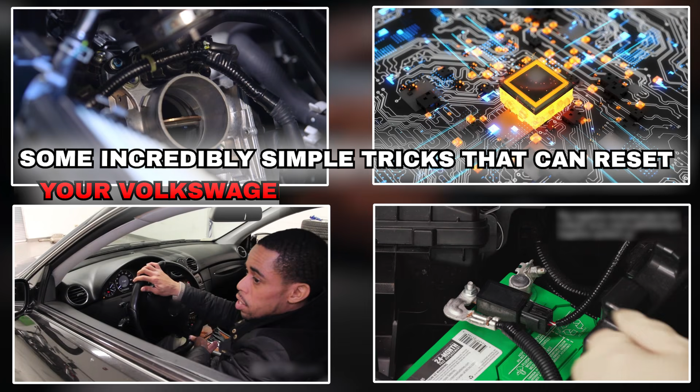If you own a Volkswagen, you've probably experienced that sinking feeling when a warning light suddenly appears on your dashboard. Maybe it's the check engine light, or perhaps the ESP warning, or even multiple lights illuminating at once like a Christmas tree. Before you panic and drive straight to the dealership, where they'll charge you hundreds just to plug in a diagnostic scanner, I'm going to share some incredibly simple tricks that can reset your Volkswagen and eliminate electronic faults without spending a single dollar.

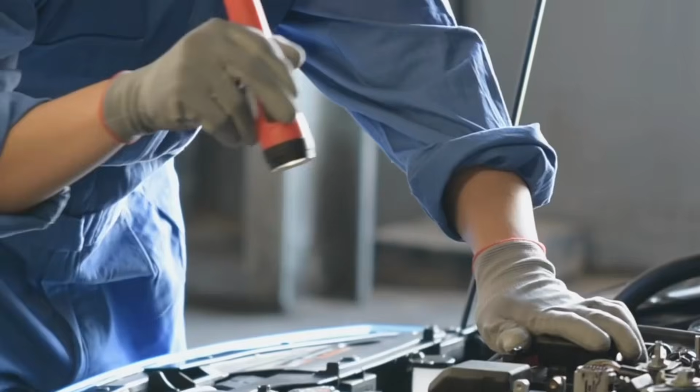These are the tricks that VW technicians know but rarely share, the same methods that dealerships use before they even start diagnosing real problems. Today, you're going to learn exactly how to do this yourself, and you'll be amazed at how many issues simply disappear with these reset procedures.

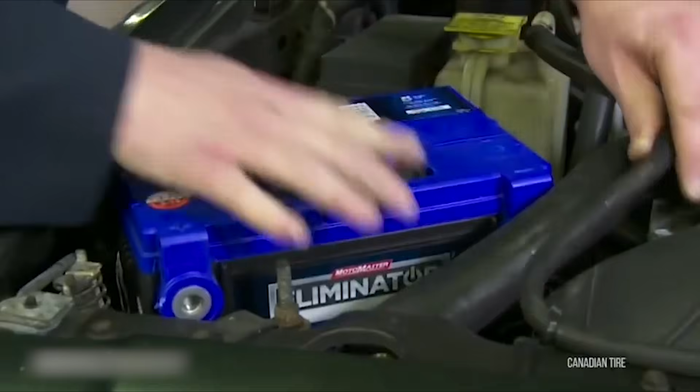Trick number 1. The battery disconnect reset. The first and most powerful trick is the battery disconnect reset, and it's so simple that you'll wonder why nobody told you about this before. This method works on virtually every Volkswagen ever made, from classic air-cooled Beetles to the latest electric ID models.

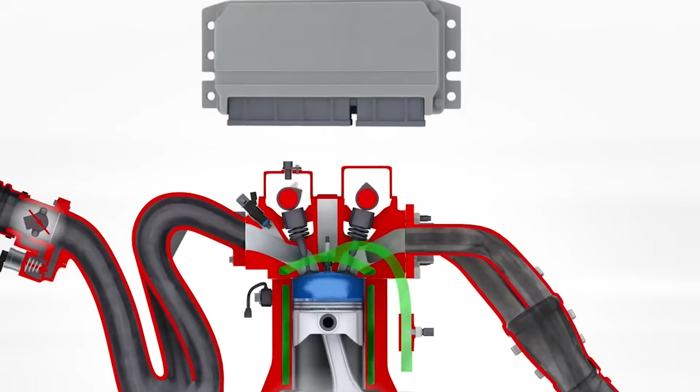Here's what happens inside your VW's computer systems. Over time, the various control modules store fault codes and adaptation values that can become corrupted or outdated. Sometimes a glitch occurs, a sensor sends a bad reading, or the computer simply gets confused by conflicting information. The battery disconnect reset clears all of this out and forces the system to start fresh.

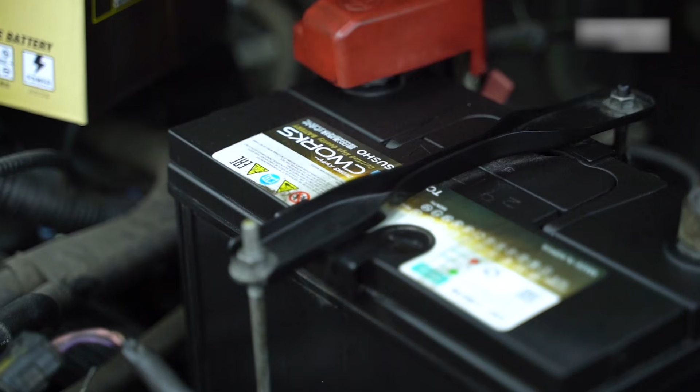To perform this reset, you'll need to locate your battery, which in most VWs is either under the hood or in the trunk. Once you've found it, you're going to disconnect the negative terminal first, which is the black cable. Use a wrench to loosen the bolt, slide the cable off, and make sure it doesn't touch the battery post.

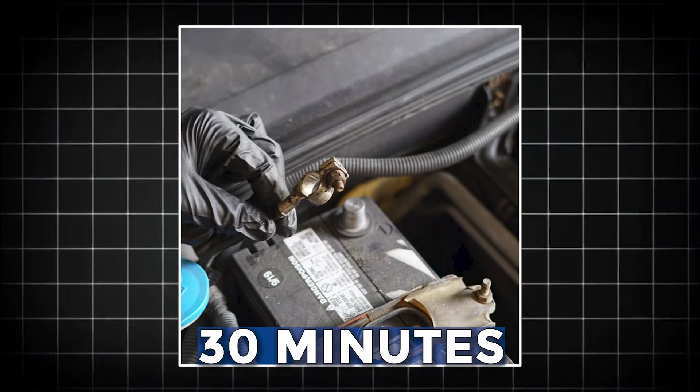Now here's the critical part that most people get wrong. You need to wait at least 15 minutes, but ideally 30 minutes or even longer. During this time, the capacitors in the various control modules fully discharge and all the stored electrical energy dissipates. Some people make the mistake of reconnecting after just a minute or two, and this doesn't fully reset the system.

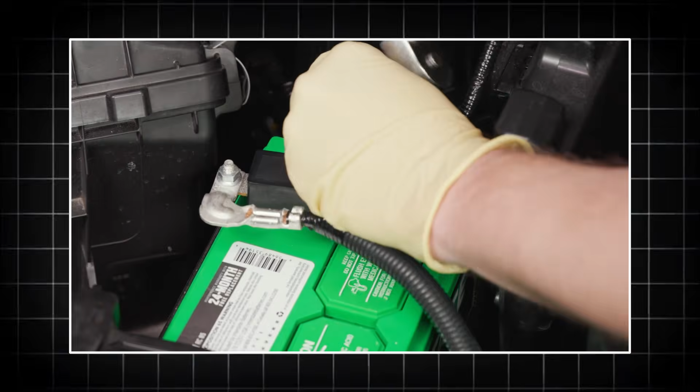After waiting the full duration, reconnect the negative terminal, tighten it securely, and start your car. You'll notice that the radio presets are gone, and the clock needs resetting, which is actually a good sign that the reset worked. Drive the car for about 20 to 30 miles, going through various conditions like highway cruising, city

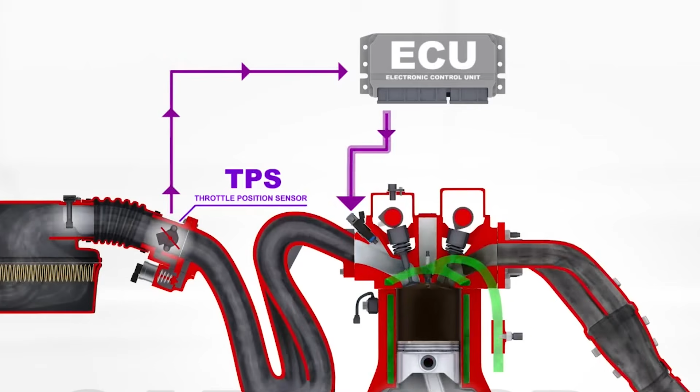driving, and some acceleration. This allows the computer to relearn all the sensors and adaptation values. In many cases, warning lights that were previously illuminated will simply stay off because the fault was just a glitch in the system.

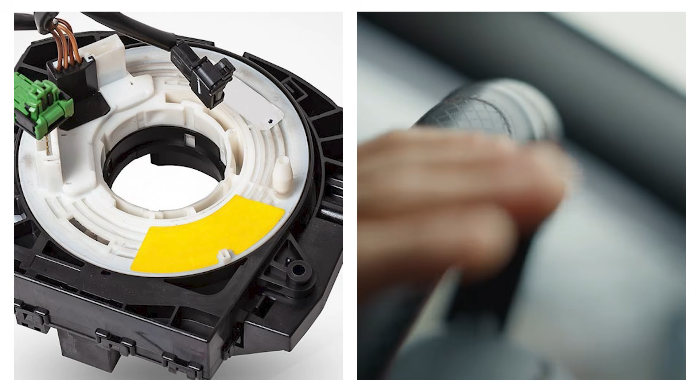Trick number 2. The steering angle sensor reset. The second trick is the steering angle sensor reset, which is incredibly important because this sensor affects multiple systems in your Volkswagen. The steering angle sensor tells the car exactly where your steering wheel is pointed, and this information is used by the ESP system, the stability control, the adaptive headlights, and even the cruise control.

When this sensor gets out of calibration, you might see ESP warnings, traction control lights, or even steering wheel position warnings. The beautiful thing is that you can often recalibrate this sensor yourself without any special tools. Start by making sure your car is on level ground and the steering wheel is perfectly centered. Turn the ignition on, but don't start the engine yet.

Now turn the steering wheel all the way to the left until it stops. Hold it there for 2 seconds, then turn it all the way to the right until it stops, and hold it there for 2 seconds. Finally, return the steering wheel to the center position. Turn off the ignition. Wait 10 seconds, then start the car. The steering angle sensor has now recalibrated itself in many VW models.

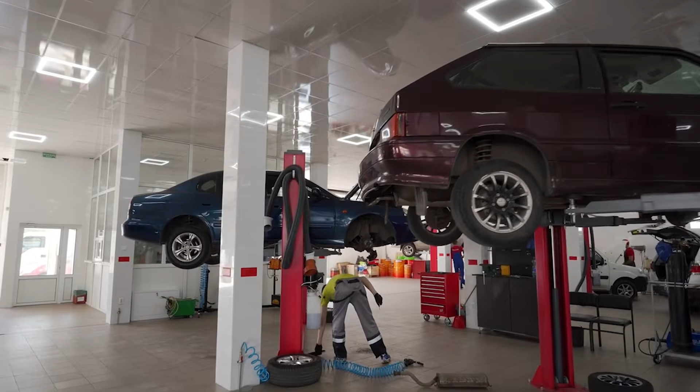If you have VCDS or OBDeleven, you can verify the calibration by checking the steering angle value, which should read very close to 0 when the wheel is centered. This simple procedure has saved countless VW owners from expensive dealership visits for something that takes less than a minute to fix.

Trick number 3. The throttle body adaptation reset.

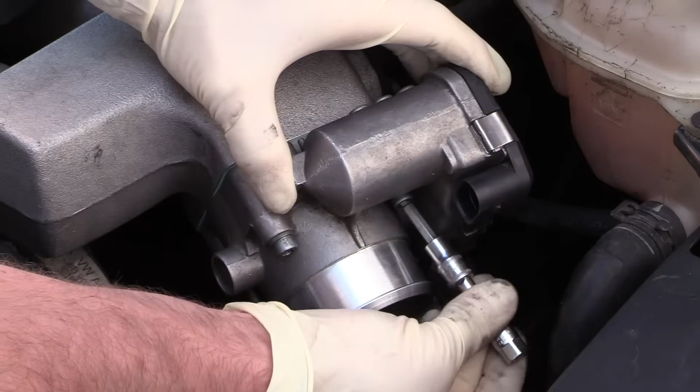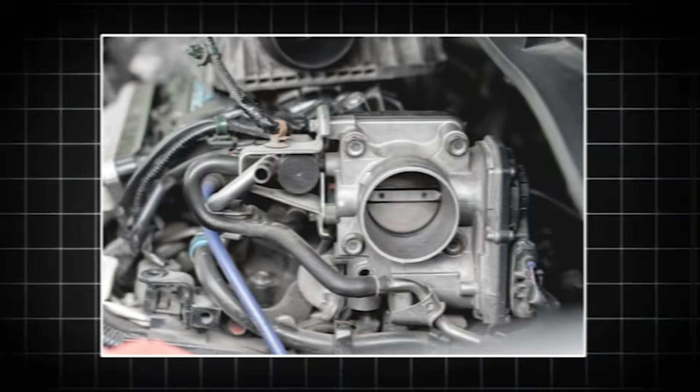The third trick involves resetting the throttle body adaptation, and this is particularly useful if you're experiencing rough idle, hesitation, or poor throttle response. Modern Volkswagens use electronic throttle control, which means there's no physical cable connecting your gas pedal to the throttle body. Instead, sensors tell the computer how far you've pressed the pedal, and the computer decides how much to open the throttle.

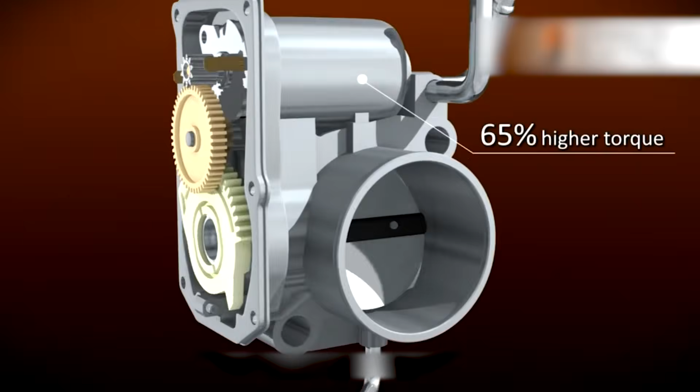Over time, carbon builds up in the throttle body, and the computer adapts to this buildup by changing how it controls the throttle position. If you clean your throttle body or if the adaptation values become corrupted, you need to reset these values so the computer can relearn the proper throttle control. The procedure is straightforward, but must be followed precisely.

Turn the ignition on without starting the engine and wait exactly 2 seconds. Now press the accelerator pedal all the way to the floor and hold it there. Keep holding it down while you turn the ignition off and continue holding for another 10 seconds. Release the pedal completely, wait another 10 seconds, then start the engine without touching the accelerator.

Let the car idle for at least 3 minutes without touching any pedals or controls. During this time, the engine might hunt a bit or idle roughly, which is completely normal. After the 3 minutes, turn off the engine, wait 10 seconds, then restart it.

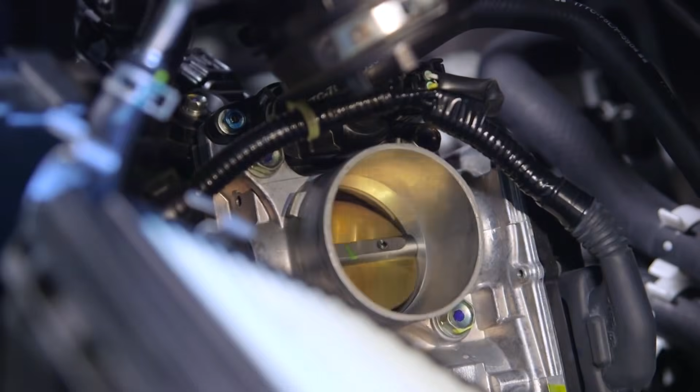The throttle body adaptation is now reset, and the computer will relearn the proper values as you drive. You should notice smoother throttle response and better idle quality immediately, and it will continue to improve over the next few drive cycles.

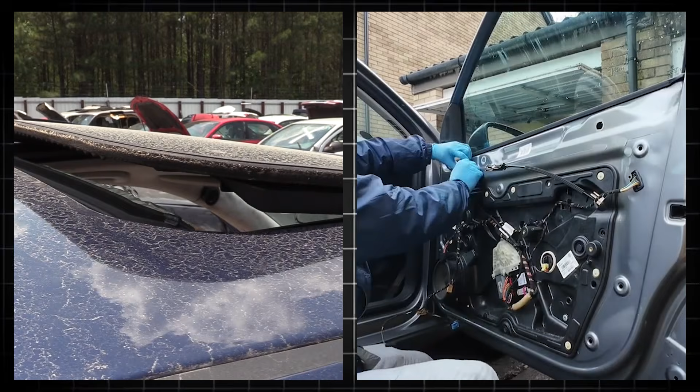Trick number 4: the window and sunroof reset. The fourth trick is the window and sunroof reset procedure. And while this might not seem like a major electronic fault, window and sunroof malfunctions can be incredibly frustrating. Volkswagen windows and sunroofs have anti-pinch sensors and auto up and down features that require the control module to know exactly where the window or sunroof is positioned at all times.

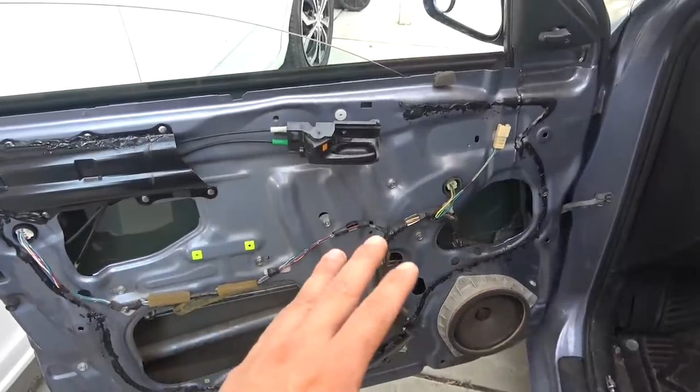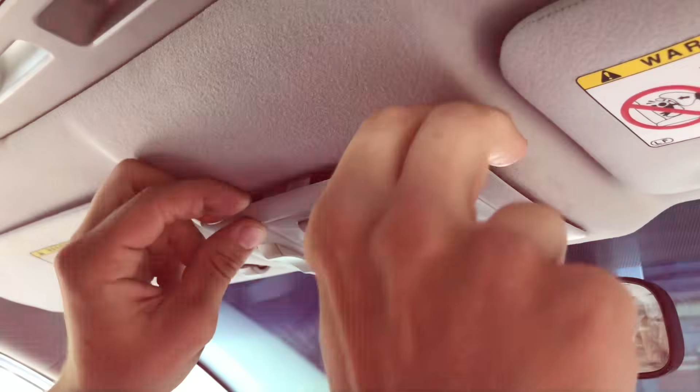If the battery has been disconnected, if the window has been forced, or if there's been any electrical glitch, these positions can become lost. When this happens, your windows might not go up or down properly, the auto function might stop working, or the sunroof might refuse to operate at all. Resetting these systems is simple, but requires patience.

For the windows, start with the driver's window. Pull the window switch up and hold it until the window is completely closed. Then continue holding the switch for an additional 5 seconds. Release the switch, wait 2 seconds, then pull it up again and hold for another 2 seconds.

Now push the switch down to open the window completely. Hold it for 5 seconds after it's fully open. Then continue holding for another 2 seconds. The window control module has now relearned the full travel range. Repeat this exact procedure for each window in the car.

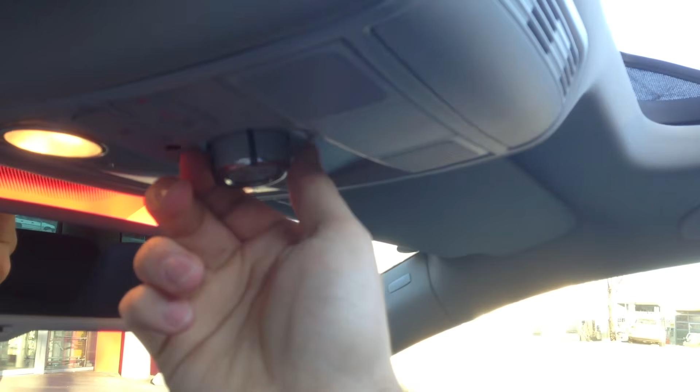For the sunroof, the process is similar but slightly different. Close the sunroof completely using the close button, then once it's closed, continue holding the button for 10 seconds. You might hear some clicking or slight movement, which is the system calibrating its endpoints.

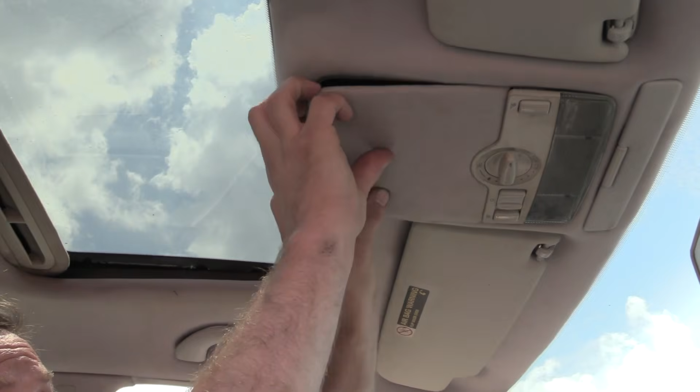Open the sunroof completely, hold the button for 10 seconds, then tilt it up fully and hold for 10 seconds. The sunroof control module now knows its full range of motion again. These resets eliminate the vast majority of window and sunroof electrical complaints that would otherwise require dealership intervention.

Trick number 5: the electronic parking brake reset. The fifth trick addresses one of the most common VW problems, the electronic parking brake fault. Many modern Volkswagens have electronic parking brakes instead of the traditional handbrake lever, and while these systems are generally reliable, they can throw errors and refuse to operate. Sometimes you'll see a warning light, sometimes the brake won't release, and sometimes it won't engage at all.

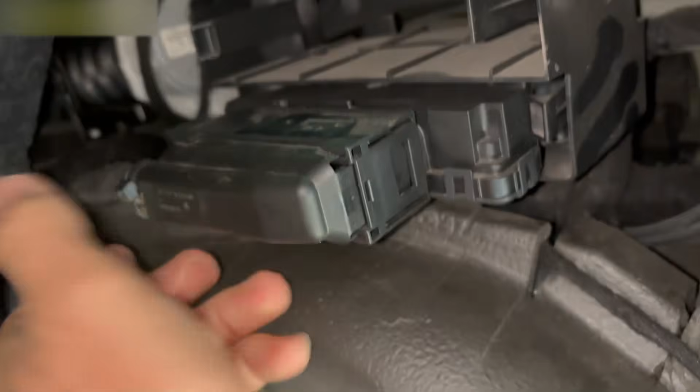Before you assume you need a new parking brake module or expensive repairs, try this reset procedure. Make sure the car is in park or neutral with the engine running. Pull and hold the parking brake switch up for about 2 seconds, then release it. Immediately push the switch down and hold it for about 2 seconds. You should hear the parking brake motor cycling, which sounds like a mechanical whirring noise. Repeat this cycle 3 or 4 times, pulling up and holding, then pushing down and holding.

What you're doing is exercising the parking brake mechanism and allowing the control module to relearn the positions. After doing this several times, turn off the engine, exit the vehicle, lock it, and let it sit for about 5 minutes. When you return and start the car, the parking brake system will have completed its calibration cycle.

This procedure often clears parking brake faults that seem serious but are actually just calibration issues. The system needs to know exactly how many steps the motor takes to fully engage and release the brake, and this exercise helps it relearn those values.

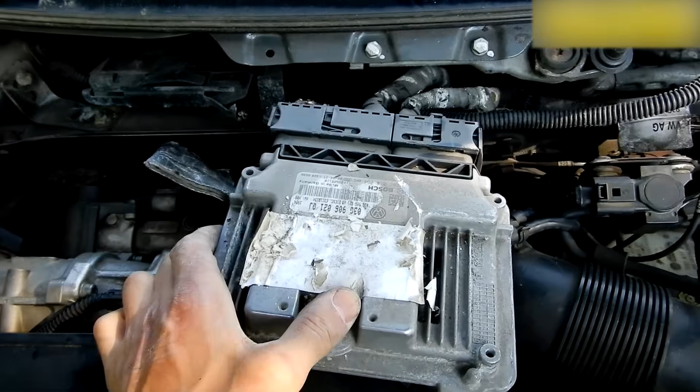Trick number 6. The ECU soft reset. The sixth trick is the ECU soft reset, which is different from the battery disconnect because it can be done without tools and without affecting your radio settings.

This reset is particularly useful when you're experiencing drivability issues, strange shifting behavior, or minor check engine lights that seem intermittent. The process takes advantage of a feature built into most VW ECUs that allows them to dump certain temporary fault codes and relearn fuel trims. Here's how to do it.

Turn your ignition to the on position without starting the car, then turn it back off. Wait 3 seconds, then turn it to on again without starting. Repeat this on-off cycle 5 times, ending with the ignition in the off position. Now turn the key to on and immediately press the accelerator pedal to the floor and release it 5 times in quick succession. After the 5th press, turn the ignition off, wait 10 seconds, then start the car normally.

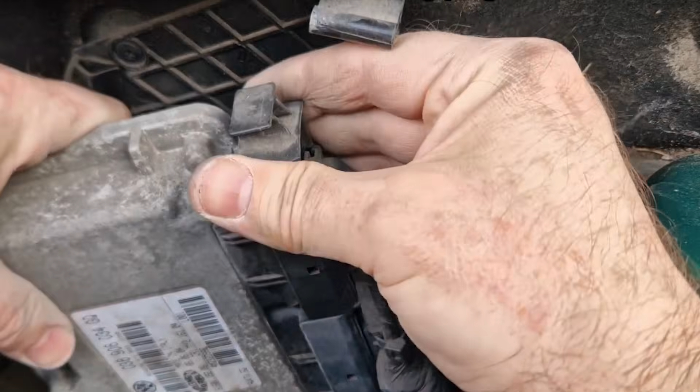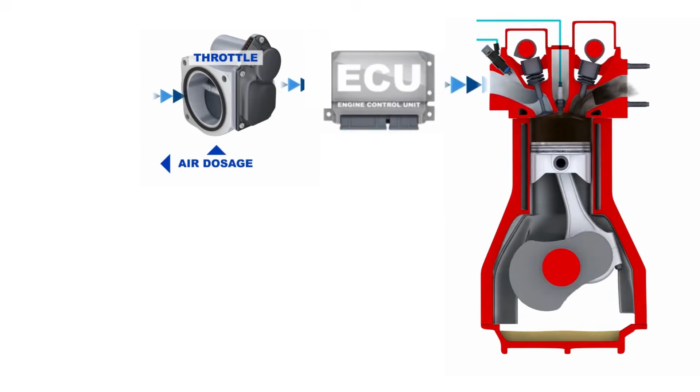What you've just done is initiated a reset sequence that many VW ECUs recognize. The computer will clear certain adaptation values and prepare to relearn fuel delivery, ignition timing, and other parameters. This doesn't clear major fault codes like a full scan tool reset would, but it does eliminate many of the minor glitches and learned behaviors that can cause drivability problems. Drive the car through several heat cycles and various conditions to allow the computer to fully relearn its optimal settings.

Trick number 7. The TPMS reset. The 7th trick involves resetting the Tire Pressure Monitoring System, or TPMS, which is required by law on all newer vehicles but can be a source of constant frustration. The TPMS warning light can illuminate for many reasons. You've rotated your tires, changed a tire, the batteries in the sensors are weak, or the system simply lost calibration.

Many VW owners don't realize that the TPMS system in their car can be reset through the infotainment system or with a specific button sequence. The exact procedure varies by model year and generation, but the most common method works like this. Make sure all 4 tires are inflated to the correct pressure as specified on your door jamb sticker.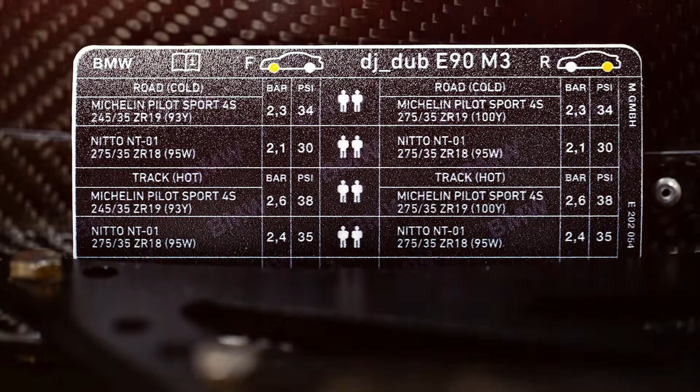Start the car and locate the car settings menu in your infotainment system. Navigate to the tire pressure section, and you should see an option that says something like Store Tire Pressures or Set Tire Pressures. Select this option and confirm. The system will now store the current pressure of all 4 tires as the new baseline.

Some older VWs don't have this menu option, and instead, you need to turn the ignition on without starting the engine, then press and hold the TPMS reset button, which is usually located below the steering column or in the glove box. Hold this button until you see the TPMS light blink 3 times, then release it. Start the car and drive for about 10 minutes at speeds above 15 miles per hour. The TPMS system will recalibrate itself, and the warning light should go out.

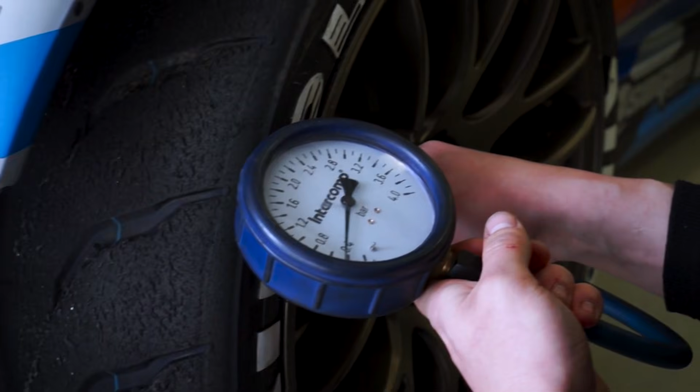If you have indirect TPMS, which is common on many VW models, the system doesn't actually measure tire pressure, but instead uses the ABS wheel speed sensors to detect differences in tire rotation. These systems need to be reset whenever you adjust tire pressures or rotate tires, and the reset procedure tells the computer what the normal rotation speed should be for each wheel.

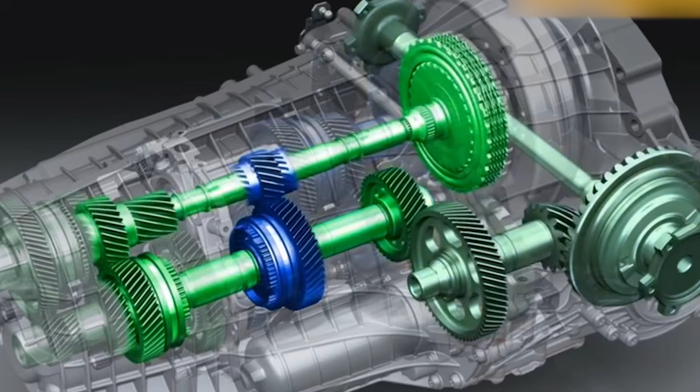Trick number 8. The transmission adaptation reset. The 8th trick is the transmission adaptation reset, and this is absolutely crucial if you're experiencing harsh shifting, delayed engagement, or erratic transmission behavior. VW automatic transmissions, particularly the DSG dual-clutch gearboxes, learn how you drive and adapt their shift patterns accordingly.

They also store values related to clutch wear, shift timing, and hydraulic pressures. Sometimes these adaptation values become corrupted or outdated, especially after battery disconnects, software updates, or unusual driving conditions. You can force the transmission to relearn these values with a simple procedure.

Start with the engine fully warmed up to operating temperature. Put the transmission in drive and come to a complete stop with your foot on the brake. Keep your foot firmly on the brake, press the accelerator pedal all the way to the floor, and hold it there for about 5 seconds while the brake is still applied. The engine will rev, but the car won't move because your brake is preventing it. Release the accelerator completely and let the engine return to idle.

Shift to neutral, wait 5 seconds, then shift to reverse and repeat the same process. Brake applied, accelerator to the floor, hold for 5 seconds, release. Shift back to neutral, then to drive, and repeat once more. After this sequence, drive the car very gently for the first few miles, allowing the transmission to relearn shift points under light load. Then gradually increase your driving intensity over the next 50 miles or so.

The transmission computer will adapt to your driving style and relearn optimal shift patterns. Many VW owners report dramatically improved shift quality after performing this reset, especially if they were experiencing harsh or delayed shifts before. Why these tricks work.

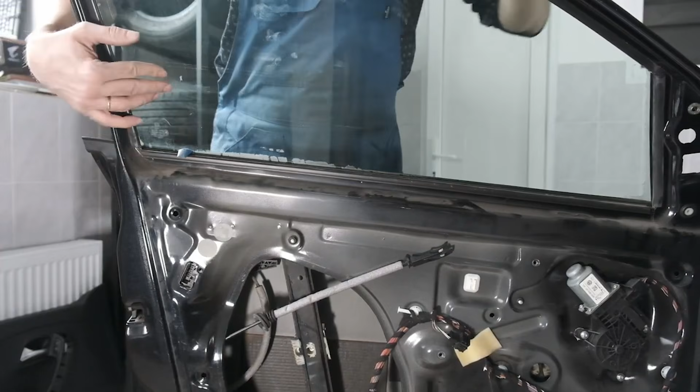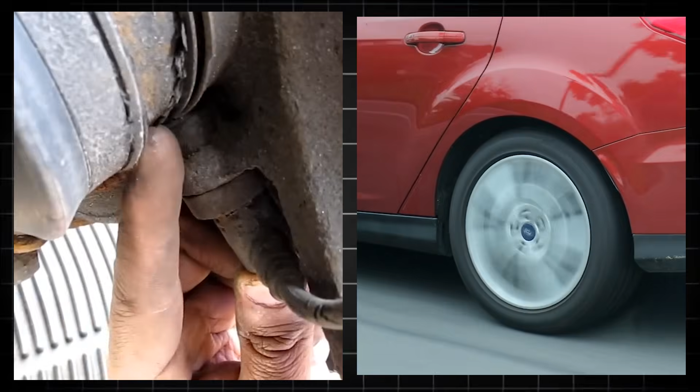Understanding why these tricks work helps you appreciate just how sophisticated modern Volkswagen electronics really are. Every control module in your car is constantly monitoring sensors, storing data, and adapting to changing conditions. The engine computer learns your driving style and adjusts fuel delivery accordingly. The transmission learns how hard you accelerate and shifts to match. The ABS system monitors wheel speeds and adjusts brake pressure thousands of times per second.

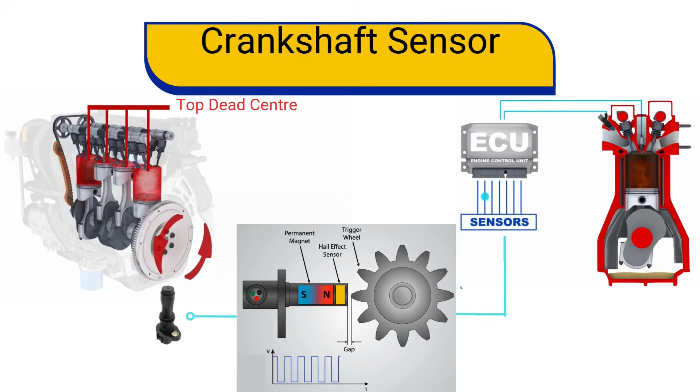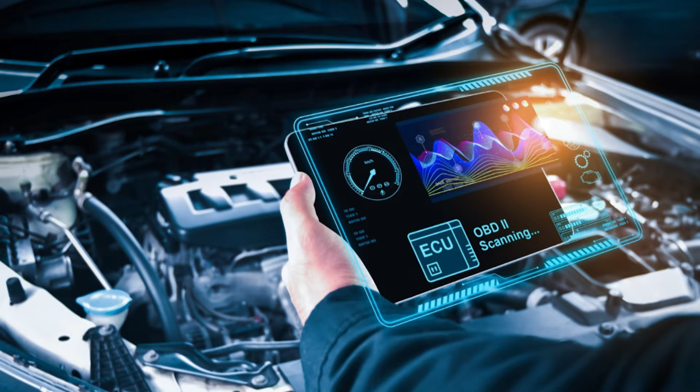All of this requires the modules to store adaptation values, which are essentially the computer's memory of what's normal for your specific car. When these values become corrupted, outdated, or simply wrong due to a glitch, the systems can malfunction even though the hardware is perfectly fine. The reset procedures force the computers to forget these stored values and start fresh, relearning everything from scratch based on actual current sensor data rather than potentially corrupted stored data. When to use these tricks.

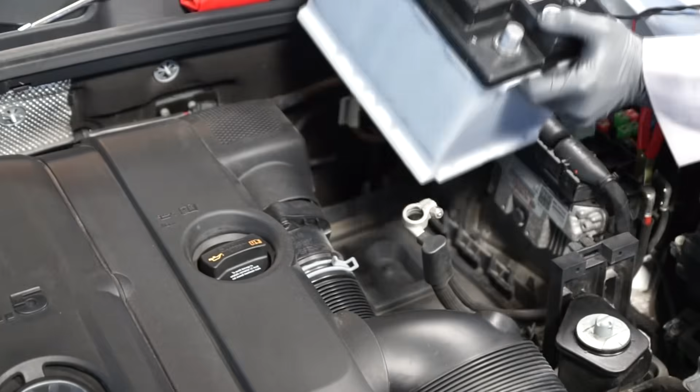Knowing when to use these tricks versus when to seek professional help is important. These reset procedures are incredibly effective for intermittent problems, warning lights that come and go, systems that work sometimes but not others, and situations where you've recently replaced a battery or had electrical work done. They're also perfect for after you've cleaned components like the throttle body or replaced sensors.

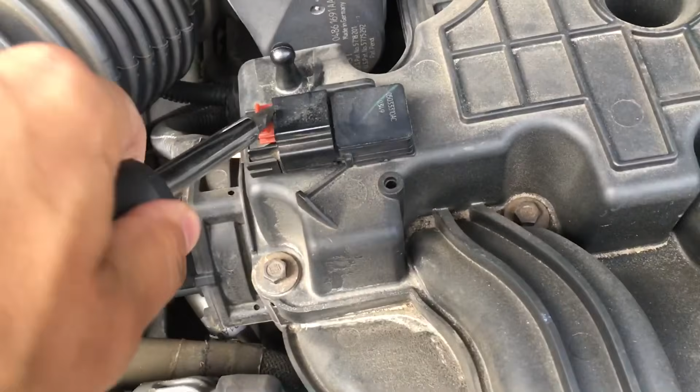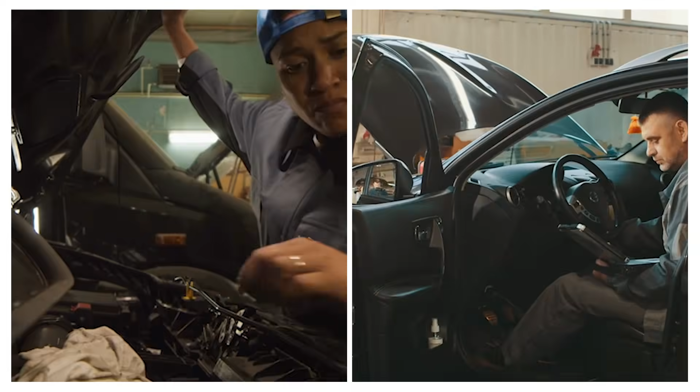However, if you have persistent warning lights that immediately return after resetting, if you're experiencing mechanical symptoms like grinding noises or fluid leaks, or if the car is in limp mode and barely drivable, then you likely have a real hardware fault that needs proper diagnosis and repair. The reset tricks should be your first step, not your only step. They can save you hundreds of dollars on diagnostic fees for problems that turn out to be simple glitches, but they're not a substitute for actual repairs when something is genuinely broken.

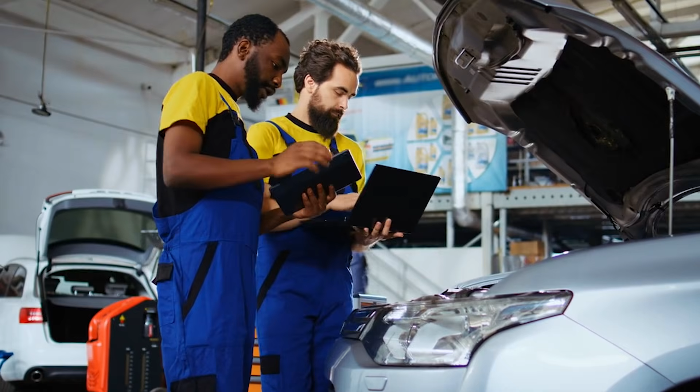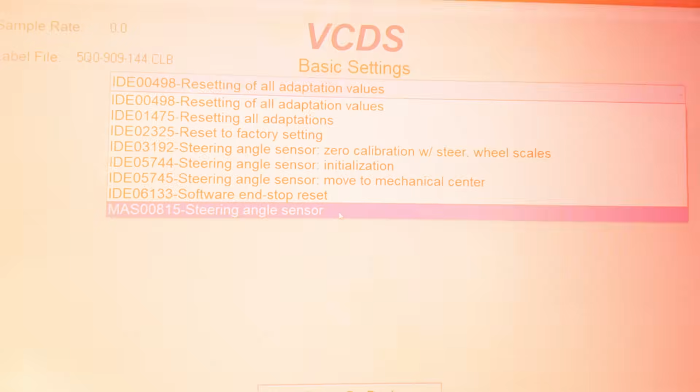The bottom line: these 8 reset tricks represent some of the most valuable knowledge any Volkswagen owner can have. They're the same procedures that dealerships and independent shops use before diving into expensive diagnostic work. Yet most car owners have no idea these simple solutions exist. The battery disconnect reset can clear dozens of fault codes and force all systems to relearn from scratch. The steering angle sensor reset fixes ESP and stability control warnings in seconds.

The throttle body adaptation reset restores smooth idle and throttle response. The window and sunroof reset eliminates frustrating malfunctions in these convenience features. The parking brake reset solves one of the most common electronic parking brake problems. The ECU soft reset clears minor drivability issues without affecting your settings. The TPMS reset eliminates annoying tire pressure warnings. And the transmission adaptation reset can transform harsh, erratic shifting into smooth operation.

Before you spend hundreds or thousands at the dealership, try these tricks. More often than not, you'll find that your Volkswagen's electronic fault wasn't a fault at all, just a computer that needed to be reminded how to do its job properly.